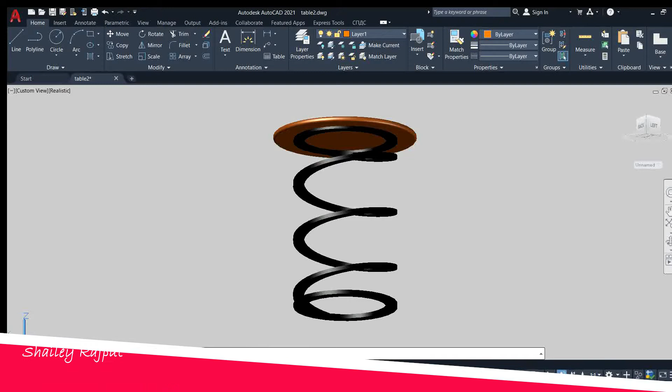I am Shailey. We are going to model this table today. The whole process will be step by step, starting from creating the 2D geometry and then converting it to 3D. So this is going to be really interesting.

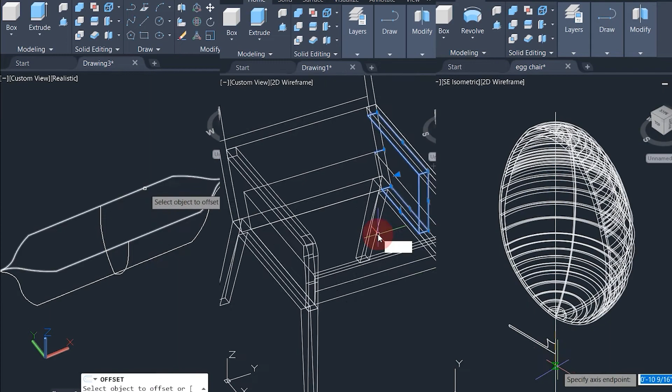Let's dive into the process and explore the method. For creating this design, you have to create a circle of 1 feet 6 inches diameter. Copy it.

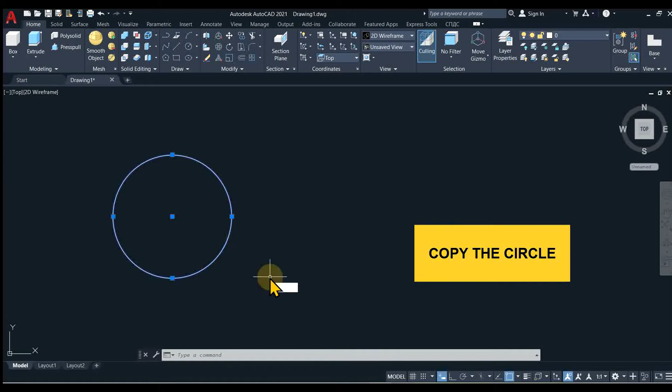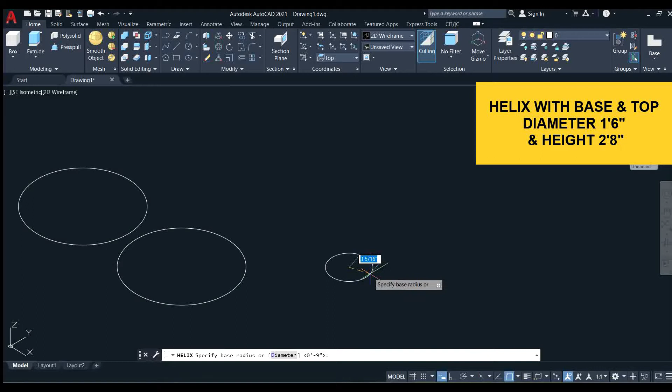Change the view to southeast isometric. Create a helix by going into the draw panel, with base and top diameter 1 feet 6 inches and height 2 feet 8 inches.

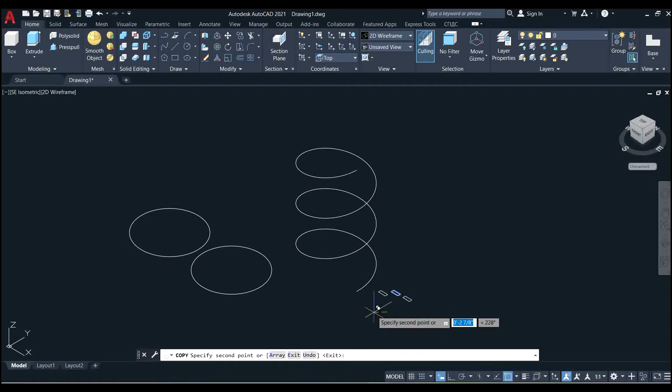Draw a small rectangle and copy it. Sweep one of the rectangles onto the helix, and another one on one of the circles that we created before.

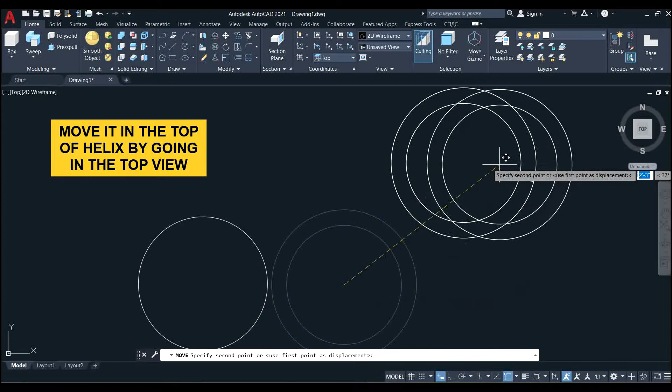Now go into the top view. Move the circles that we just used, on which we swept the rectangle, and place them onto the top of the helix.

Go into southwest isometric view. Check whether it is placed properly or not. Move it if required.

Now copy it over the top of the helix with ortho mode on.

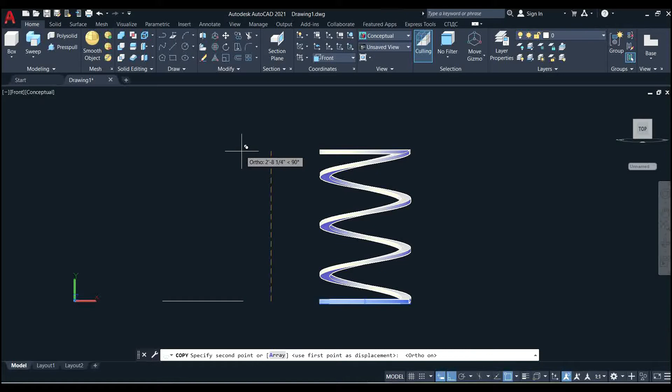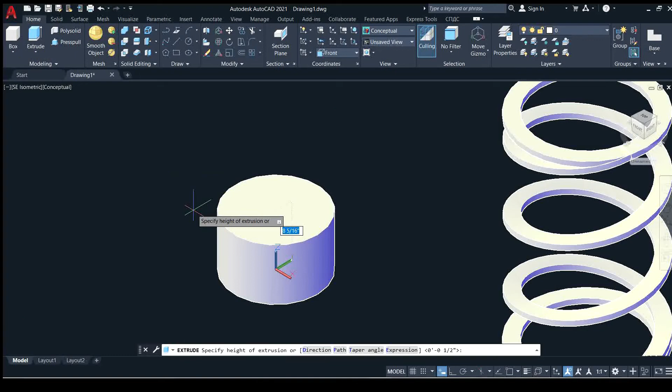Change the view to southeast isometric. Now we will model the top of the table. Extrude the circle 0.5 inches. Fillet its edges with a radius of 0.2 inches, selecting both edges.

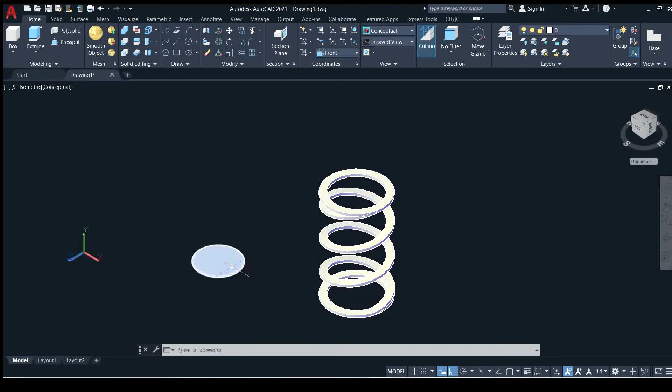Change the view to top. Scale the tabletop a little bit and then move it over the other part of the table.

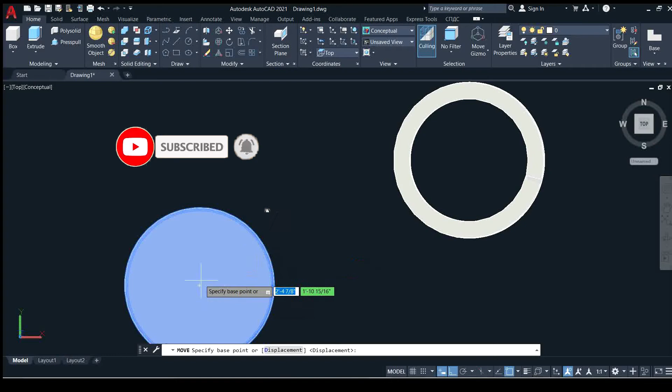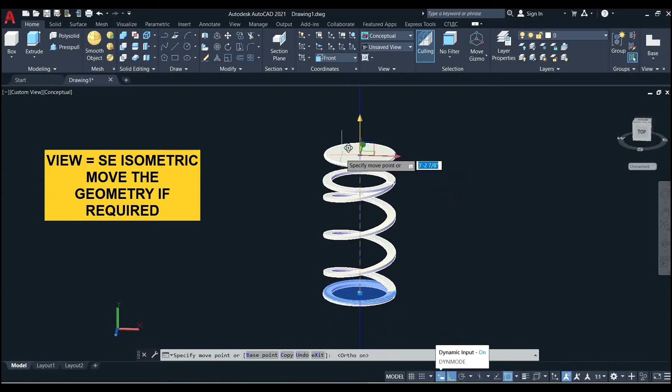Change the view to southeast isometric and see if it is placed in the right location, and if not, move it. As in my case, you can see that the top is lying on the ground, so I will move it using the gizmo. You can lock the ortho mode and turn off the O-snap if it is interfering. Scale the tabletop if required.

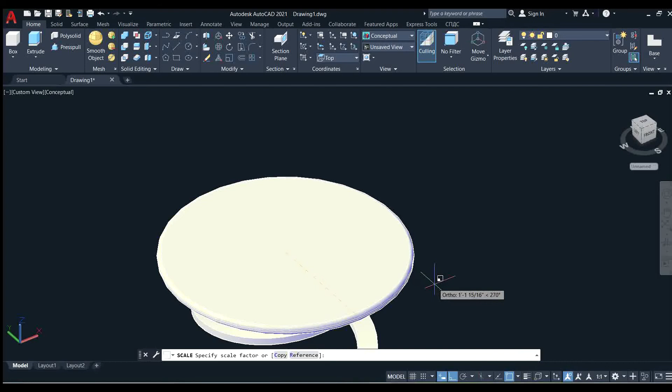You can assign layers to your model and apply materials later.

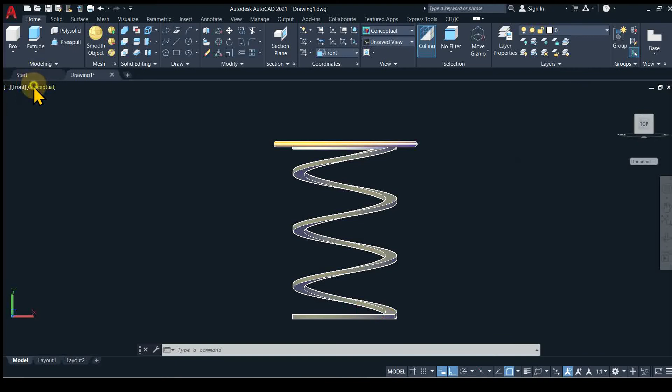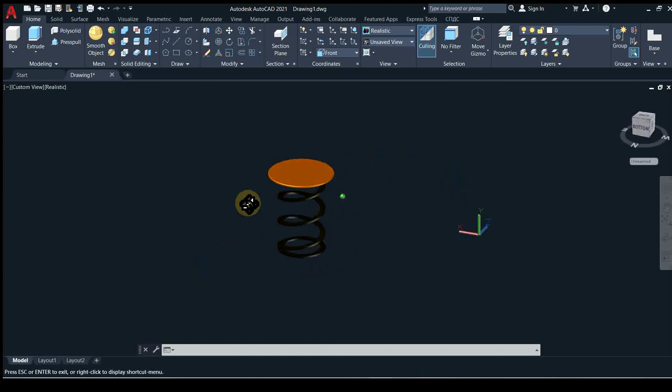So it was simple. I hope you will also be able to model it after watching this video. And if you find any difficulty, you can write in the comment section. I will guide you. We will continue doing modeling of furniture in my upcoming videos.